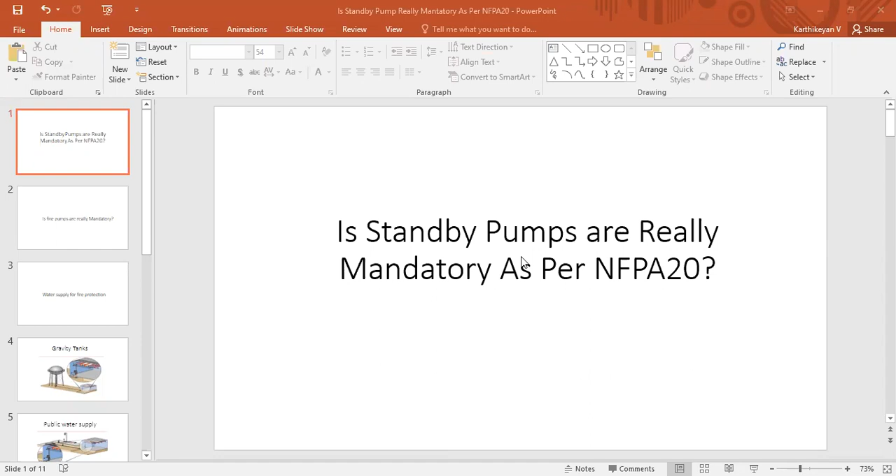Actually, this is the topic today: are standby pumps really mandatory as per NFPA 20? We are going to find the answer for this question. Prior to finding the answer, we need to know about some related things. To find the answer for standby pumps, we need to know whether fire pumps are really mandatory.

Regarding codes, NFPA 13 for sprinkler systems, NFPA 14 for standpipe systems, NFPA 15 for water spray systems. These water-based fire protection system codes do not insist on fire pumps. They just say a reliable water source shall be provided, with sufficient water supply at the system demand. Sufficient water supply means pressure and flow requirement.

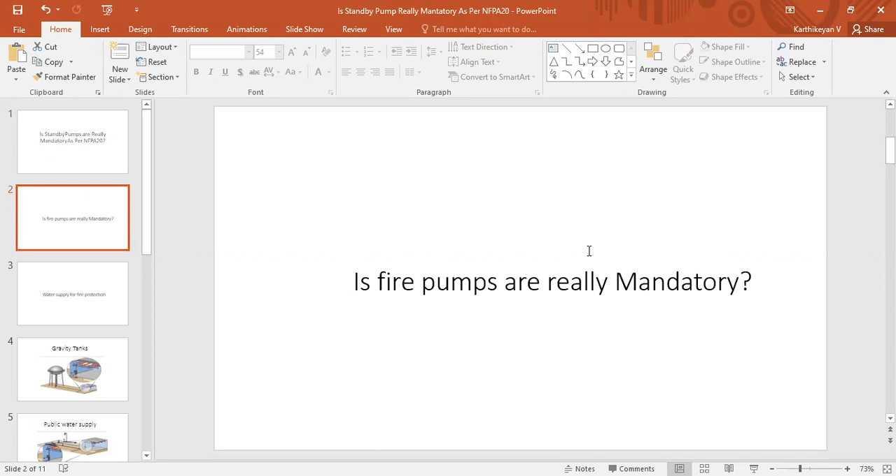So what water supply source types are available? As per the respective codes, the first one is gravity tanks. In 99% of projects you cannot see this kind of arrangement; in very old projects you can see it. Whatever your project requirement, you need to build your tank with that capacity, and whatever your pressure requirement, you need to build your tank at that height. For example, if your project has a 10 bar requirement, you need to build the tank at 100 meters of height. 10 meters equals 1 bar; that is the pressure gaining method.

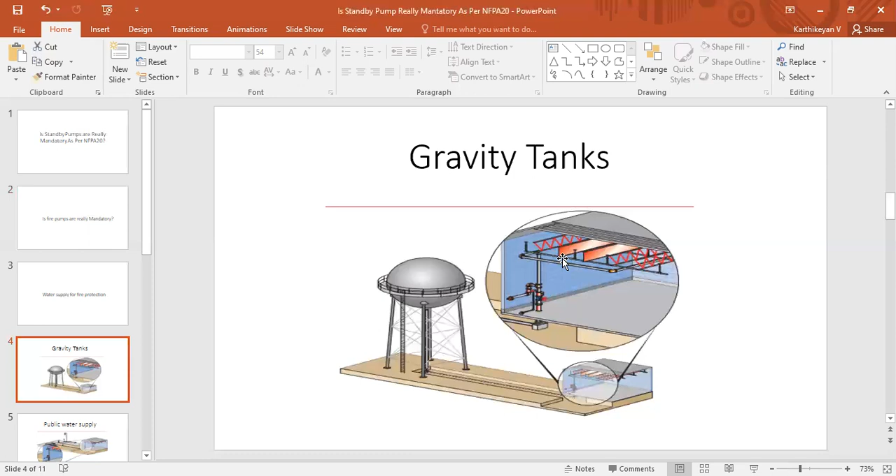And public water supply. In countries like the US and UK, the public water supply is provided with a particular amount of pressure and flow. If your project requirement is satisfied by this public water supply, you can get the tapping from it. This is another method.

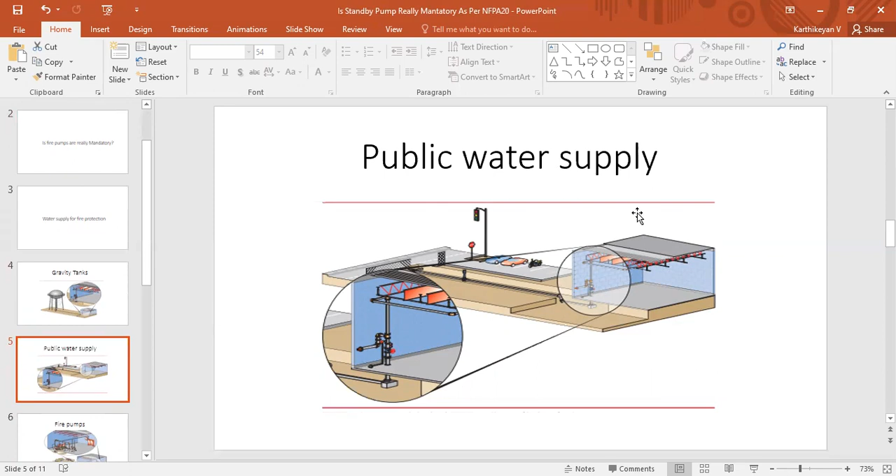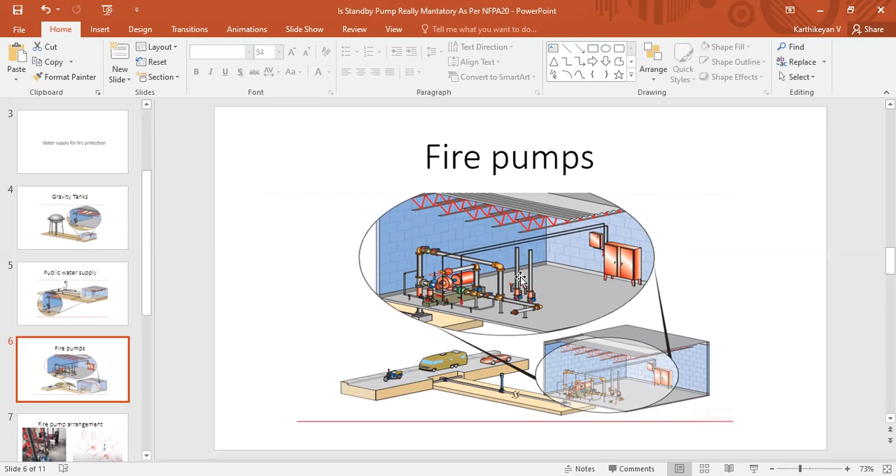The third one, the familiar method, is fire pumps. In most projects you can see this kind of fire pump arrangement. Whatever your project demand, you need to build the fire water tank along with the fire pumps. This is a fire pump room drawing, and this is a schematic. The usual arrangement is one electric operated fire pump, one diesel engine operated fire pump, and one pressure maintenance jockey pump.

The electric pump will be the main pump and the diesel engine pump will be the standby. Come back to the question: are the diesel engine operated standby pumps mandatory or not with NFPA 20? Here you can check section 9.3.3 of NFPA 20, 2019 edition.

What NFPA 20 really says: your building needs a power source, not only for the fire protection system; all building services need a power source. If your building is classified as a high-rise building, meaning its height exceeds 23 meters, then you need to provide an alternate power source as well as the main power supply. If you cannot provide this alternate power source, there is an option.

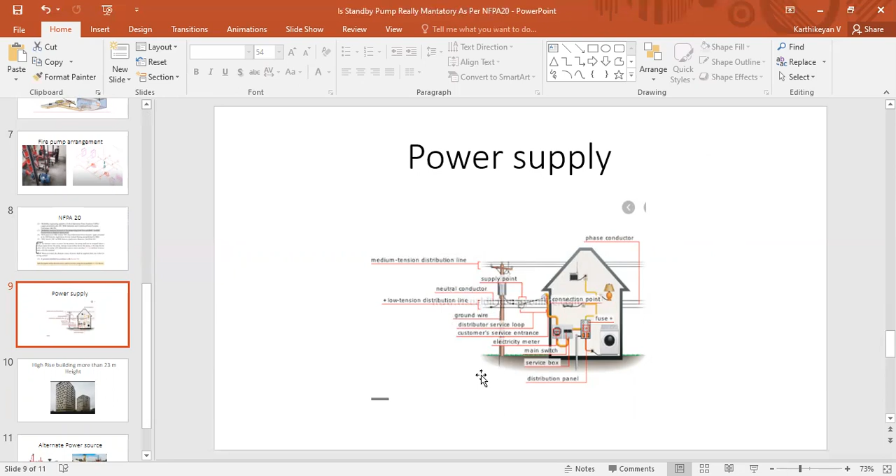You can go with a diesel engine operated fire pump or a steam turbine operated pump instead of an alternate power source. So either the alternate power source, or the steam turbine pump, or the diesel engine operated pump. This is the reason people provide a diesel engine operated fire pump as a standby pump.

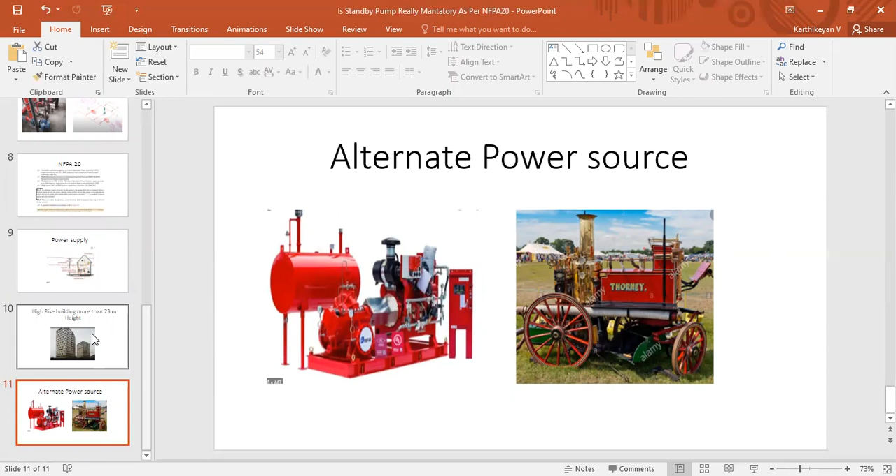But here the question arises: if my building does not exceed 23 meters height and is not classified as high-rise, can I skip this standby diesel engine fire pump? To be frank, in the projects I handled before, I never saw this kind of arrangement; even buildings less than 23 meters contained standby fire pumps. But NFPA 20 clearly mentions that if your building height is less than 23 meters and your local authority approves this arrangement, you need not go with standby pumps.

Why we are discussing this topic is that the fire pump creates a major cost impact on the project, so this is important. The NFPA annex also speaks: not only the height, but if your building contains warehouse kind of areas or assembly halls, with a high human occupant load, then also you need to go with standby pumps.

So there are some scenarios, but definitely NFPA 20 says in some cases we can skip the standby pumps and go with only the electric pump and the pressure maintenance pump. Today I just tried to convey this. I hope everyone understands this question and answer.